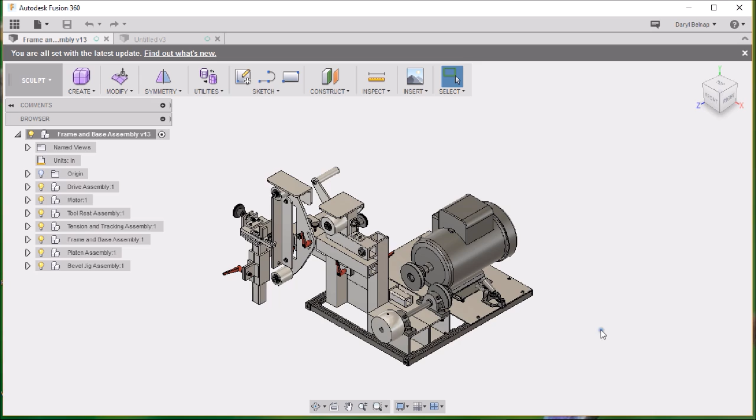This has been occupying a lot of my time the last couple months, maybe 2.5 months. I haven't been doing a huge amount of knife making. I got through the big first batch of knife making, my big first batch of little Geminis and Skinners, and then I regrouped. I'm going to apply the lessons I've learned from those to my future knife making.

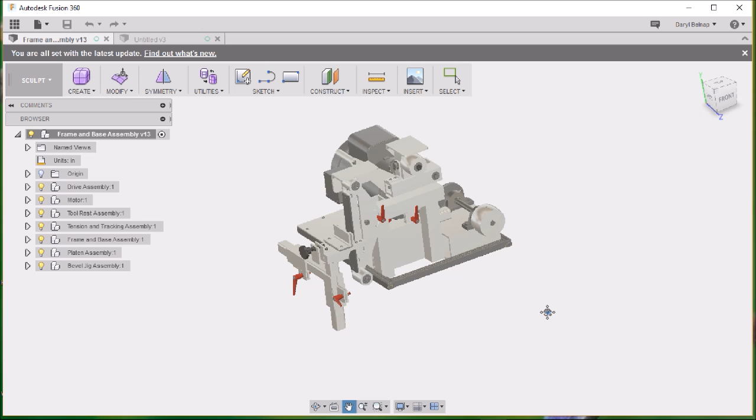So one of the things I did was redesign my sander. This is the new sander I'm going to make. Quite similar to the old one, except for some materials. This is going to be aluminum extrusion.

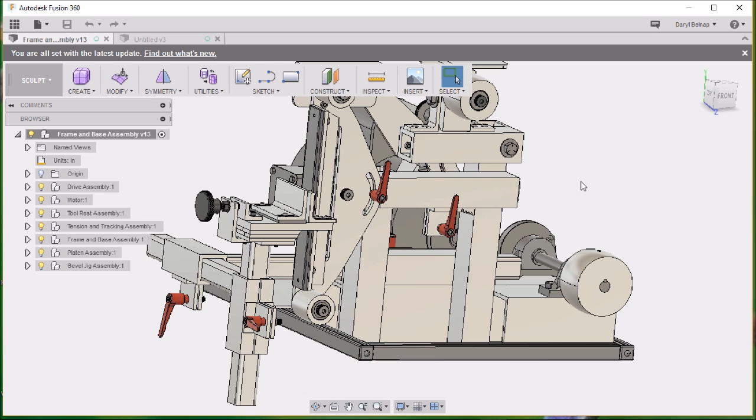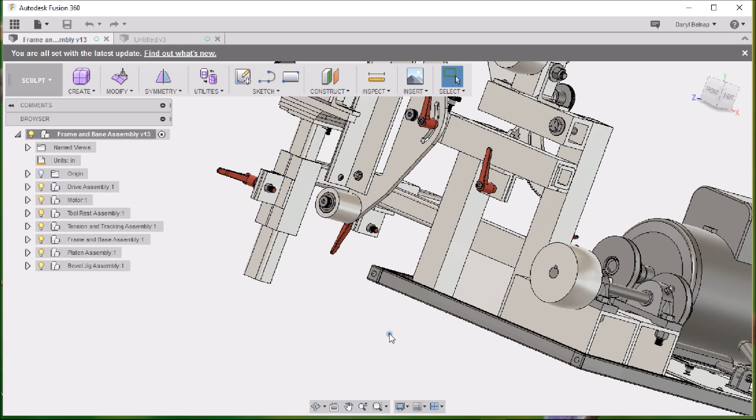I was walking through a store in Wichita, Kansas called the Yard Store, picking up some other materials, and I saw their aluminum extrusion. I saw how tight the tolerance was, so I went over and looked at it, and it turns out that a piece of 1.5 inch square aluminum will fit perfectly inside a 2.5 or 2 inch square with a 1/4 inch wall, with no slop. It is an extremely perfect fit - it will slide in there, but it doesn't slop around. They have great prices there on aluminum, actually.

So I went ahead and bought enough aluminum to make 2 sanders. And this is the clamping system I came up with here. I've converted my MIG welder so that I can weld with aluminum, so I'll do a little aluminum welding to weld these brackets on here.

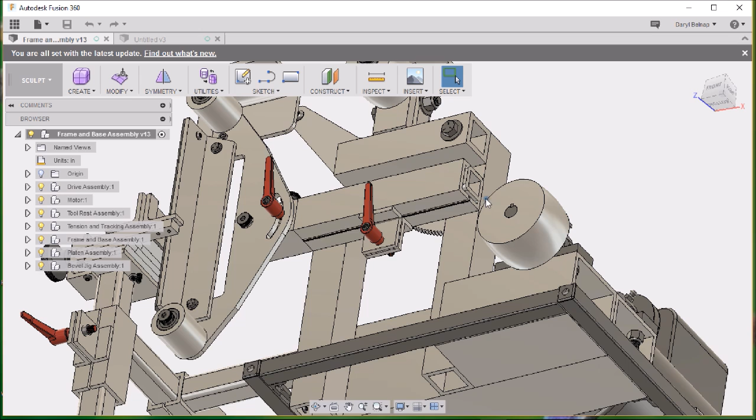I'll cut that slot on my table saw. All of this can be cut with a Diablo non-ferrous blade - it cuts really good, actually. I've cut one of these already out, but I haven't assembled it all yet.

I redesigned the platen, made it a little bit smaller, and came up with a couple of guards. I chopped off my tensioning arm - this used to stick out here about another 4 inches and had a spring that would come down.

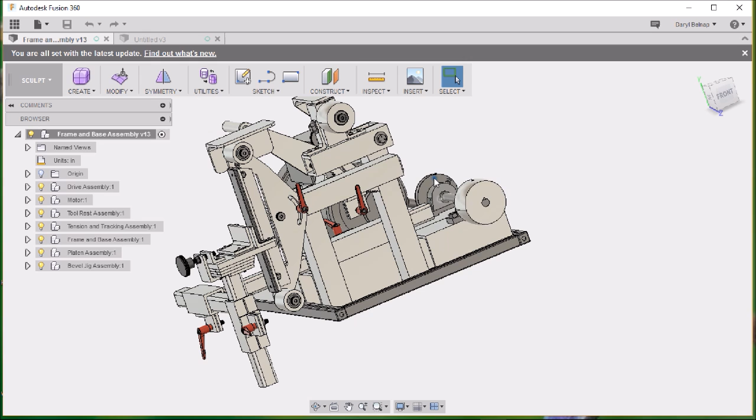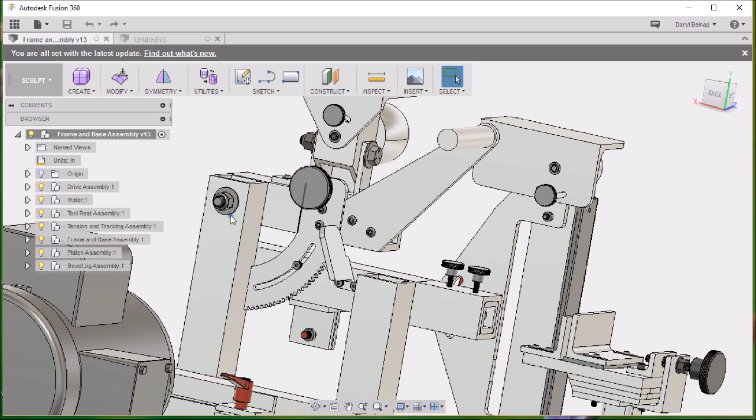This back here is pretty much all the same - the drive system. The big changes were in the tensioner. What I've done here is my new tensioning system. I went ahead and put a handle on it. Like I said, I ditched the spring, and I designed this piece here.

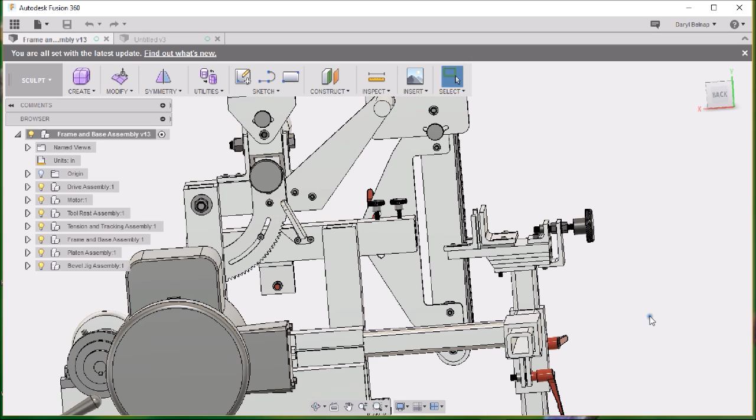So when you put your belt in, you just push up on the handle to tension the belt, and then the cog and the latch will hold it in place where you want it. When you're done, you lift up and pull back on the little paddle, and it releases it so you can change your belt.

This is going to be a big improvement here. I have already welded up the vertical frame and the base frame, and I did weld up one of these, and it makes it really, really tight. It's nice - this will slide in and out good, but just a tiny little twist on here, and you get the clamping for that 10 inches of holding that mount there.

You've got 10 inches of metal clamping down, so it's really snug. It's tight - there's no wobble.

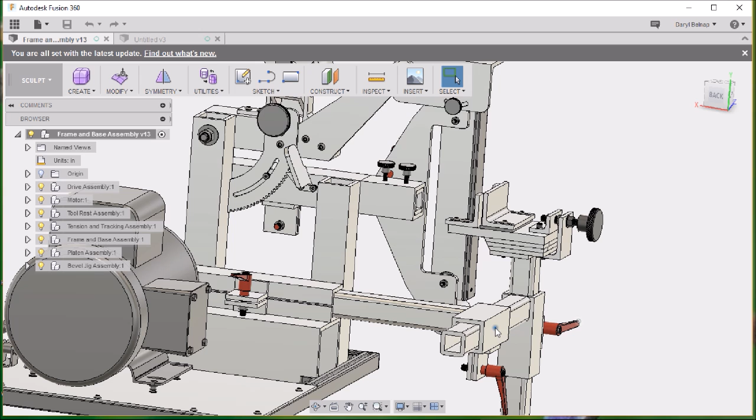What I was experiencing before, because I had used that steel pipe - I had a 2-inch steel pipe with like a 3/16 wall - when you'd put a 1.5 inch piece in there, it would flop around by about 1/8 of an inch. And then also inside, of course, when you get pipe like that, it's not square. It looks kind of square - it's square enough, but it's not square.

It's not precision square like this aluminum extrusion is, so you really have to watch when you're putting it together. And then inside of it, there's a seam where it's been welded, because the steel pipe has been folded over and welded down a seam. So you have a seam in there to deal with, in addition to the sloppiness.

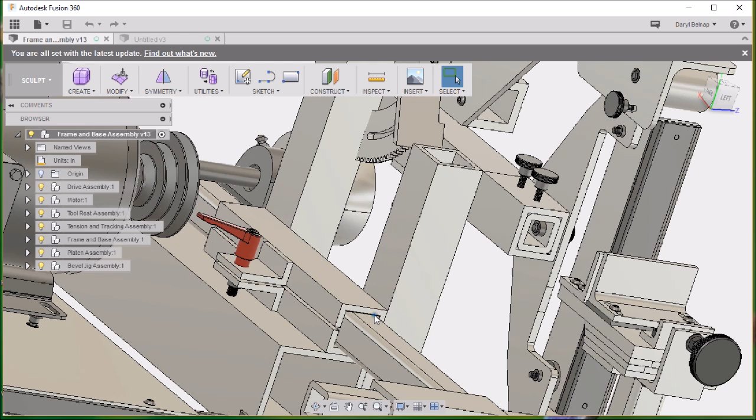That sloppiness was in here, and it was in this mechanism on my current sander, and so it would slow me down when I wanted to make changes, because I'd have to be very careful to get all the slop out in the same direction every time to get consistent results on my bevels.

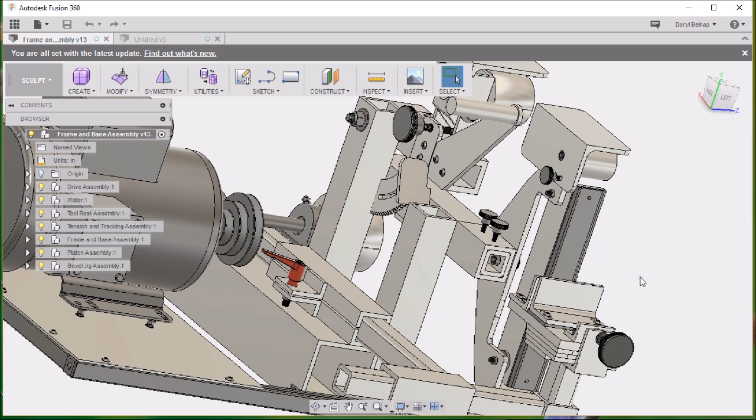So I went ahead and designed all that out using this. This comes in square corner or rounded corner, so I'm going to use the rounded corner inside. The square corner actually does slip in there very nicely as well, but I'm just going to use the rounded corner, because no special reason.

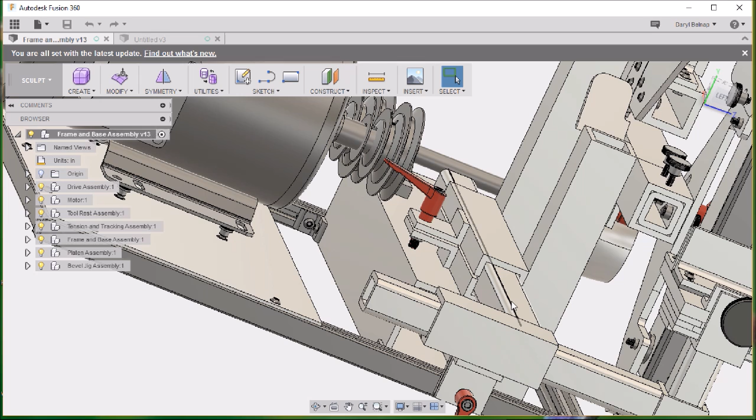If there's a special reason, I haven't figured it out yet. I just decided I want to use rounded corners on those parts. Maybe there's subconsciously a special reason, but I can't think of it.

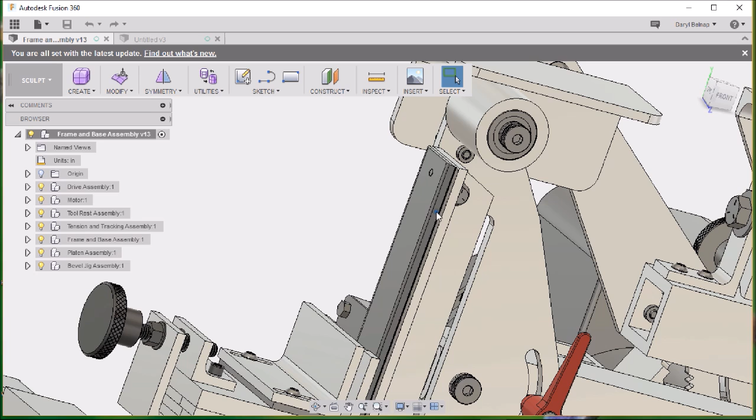This is something new that I wanted to try on my Platen. This is going to be a little profile plate. Let's look at it from the edge. So a little profile right there, instead of having a harsh cut at the ricasso for my plunge. Some of them I want to blend in, so I'm going to experiment with this to see how this will work out.

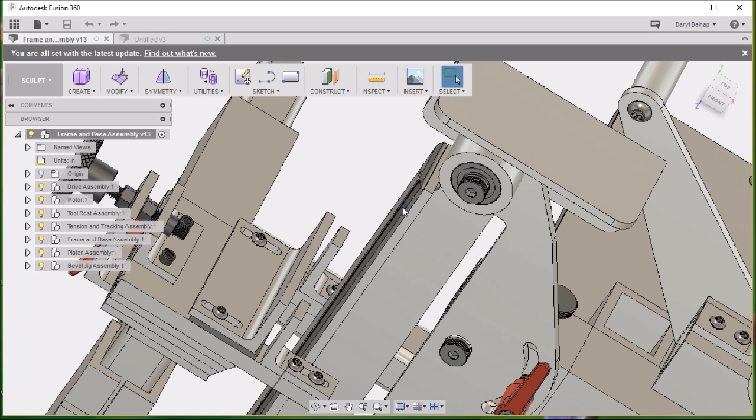What I'll do is get a lightweight belt, something thin and real flexible, and I'll roll it out. I'll use the tracking wheel to move it out past the edge, so when I come in, the belt will kind of roll around this radius a little bit and give a blended sanding at the ricasso area. That's an experiment. I hope it works the way I think it should work.

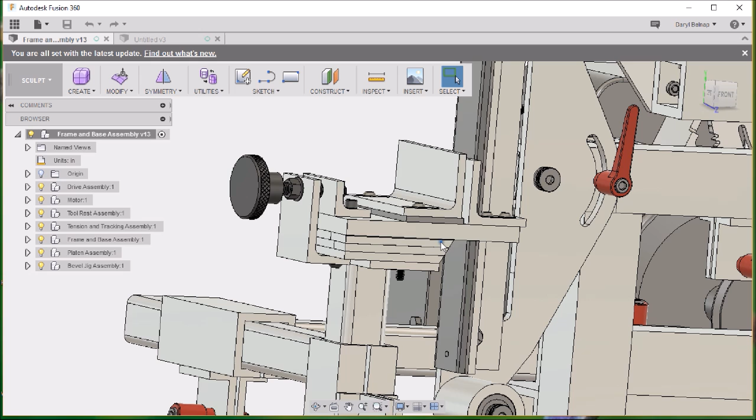This is the bevel sander, the bevel jig, bevel grind jig, whatever we're going to call that. The design is finished. I've actually posted it on my web store and sold a bunch of them already. 5, that's a bunch.

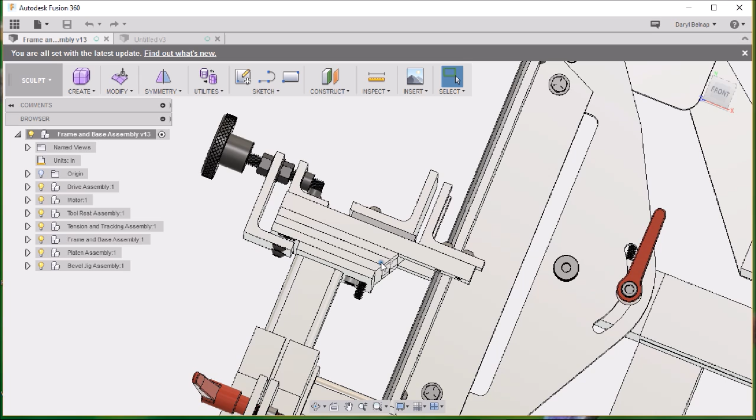This isn't the final one. I haven't updated this print yet, but while I was home this last time, I went ahead and cut this part off of my current bevel jig, the one I had made out of steel. I took it apart and cut that off.

That allows me to rotate the Platen a lot farther over, because the Platen will rotate here. It will rotate far enough that I can now do the secondary bevel, which is the cutting bevel. So this is a full bevel solution right now. I can go from an unground knife blank, grind the primary bevel, and then by having this cut out of the way, I can rotate the Platen a little bit farther and get nice secondary bevels on there.

What I've done so far, I've done it on one knife just to test out the concept. I put a 600. Let's see, started out with like a 320 and put the bevel on there with the 320, and then I touched it with a 600, and then I hit it on the leather wheel, and it came out real good.

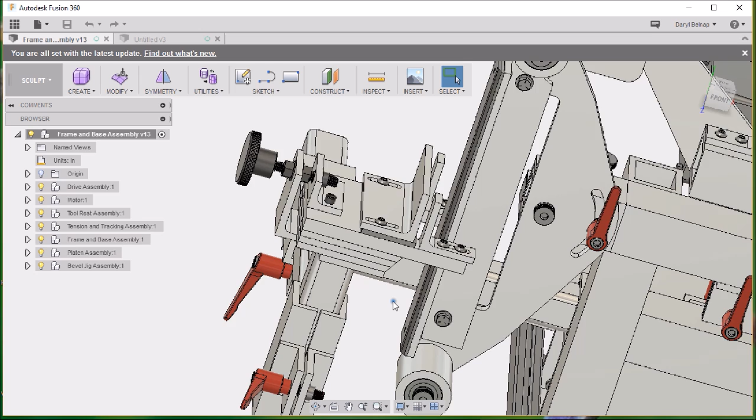So what I'm going to do is get a leather belt. Actually, you can buy 2-inch leather belts, 2x72 leather belts, so I'll put one of those on here, and everything will be on this machine then. In addition to that...

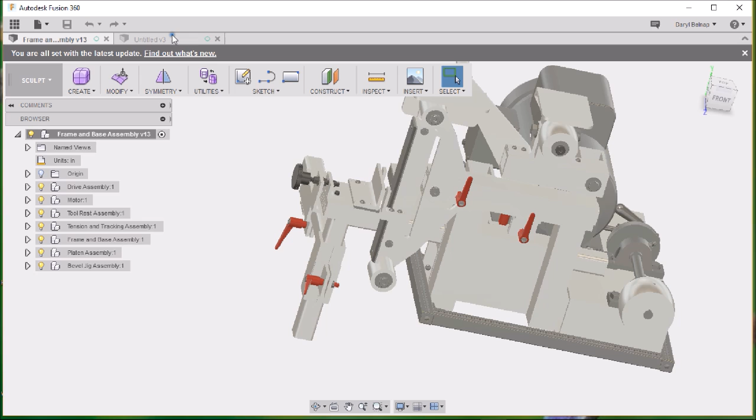Let's see, I am working on this idea here. This is the machine with the hollow grind contact wheel on it. There's a 10-inch wheel that I use to do hollow grinding. It goes in place of the Platen. It's just pull it out and plug it in, very quick.

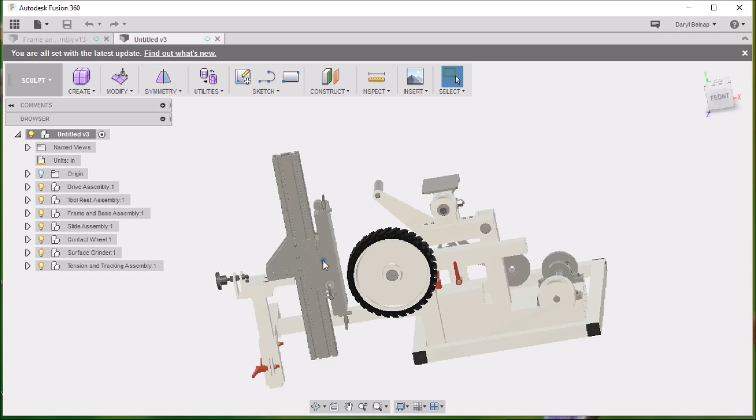But this thing is going to be a surface grinding attachment. You can see here that it will transit in and out. I just put the bevel jig in there for now, but it'll be a similar thing to the bevel jig that will push it in and out to the wheel. And then what this is...

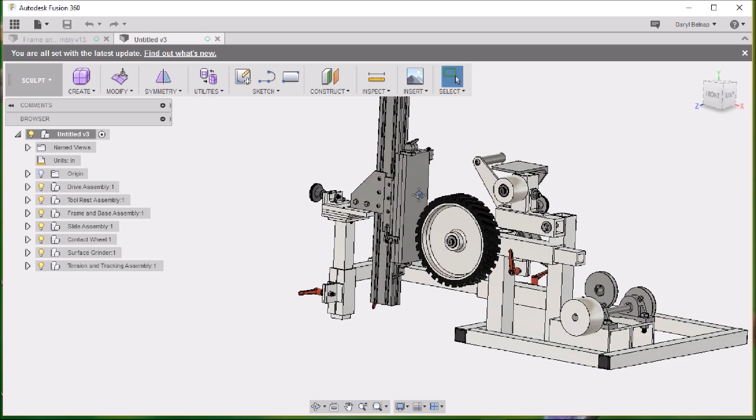The 80/20 website, you can download tons of CAD files, which is awesome. So I got a piece of their extrusion there, and some of their gussets, and one of their linear bearings. This is one of their linear bearings right here.

And then on top of it, I bolted this plate mechanism so that it will tilt out at the bottom. It'll hinge right here and tilt out at the bottom. And also I've got another one that tilts this way. I may get rid of this one that tilts side to side and just go with the bottom tilted.

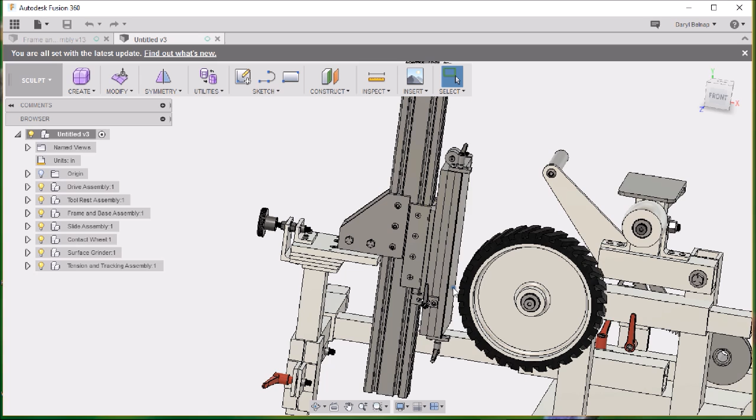Anyway, this is going to be a surface grinder, so you can grind the thickness of your blade. By having it tilt out, and having this table mechanism sliding up and down, you can do tapered bevels, like tapered tangs. You can do a distal taper on your blade. So there's quite a few possibilities there, and probably some more that I haven't thought about. Once I get into it, I'll start seeing what its capabilities really are.

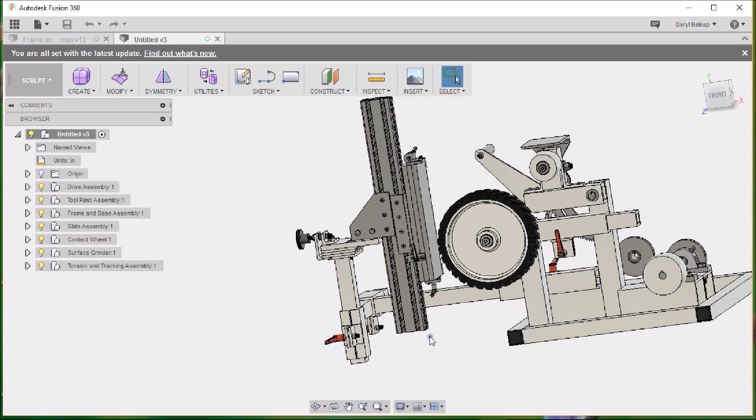But I got that idea from looking at the TW90. He has a real cool surface grinder attachment for his sander over there, and that's where I got that idea from. So I've got two attachments on there at the moment.